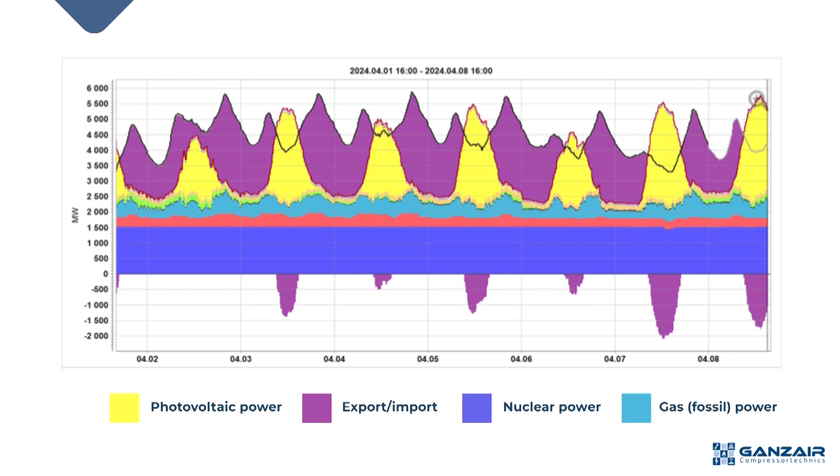The other is the general concept of being as independent from other countries as we can. Nuclear power and photovoltaic plants are getting more and more important in the national energy mix. The third is the functional and technological aspect. Electricity balancing and energy storage is a main challenge here.

Green hydrogen can be a reliable solution for this problem. Green hydrogen can be stored longer than electricity in a battery. On this graph, you can find PV in yellow, and you can see at noontime the excess energy is a very big challenge to export or use. Hydrogen can be a very good solution for this problem on the usage side, and also to store the energy as hydrogen.

Ganzair's experience is that lots of industrial companies also feel this challenge. Great, thank you very much. Ákos, could you add something to this topic?

We have a little experience with photovoltaic parks right now. The plus side is these parks are relatively cheap and easy to maintain. But when we have sunshine, these parks make a lot of energy, which you have to use or transfer. So the question is, what do you do with the excess energy in daytime? If you want to transfer it, the peak performances during daytime really stress the systems. So you need to find a way to equalize it or use it internally.

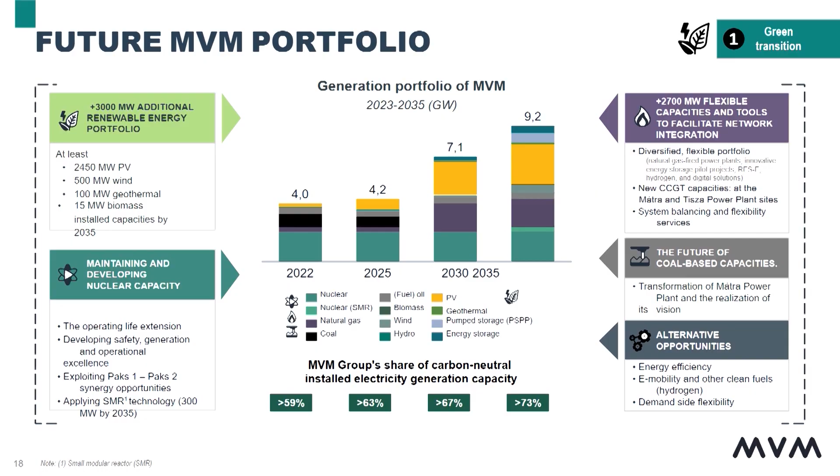The current solution for this is actually another form of flexibility imports from the surrounding region. We are quite well integrated in the electricity market with our surrounding region. So the hydropower plants from the Balkans, south of Hungary, and from Austria, for example, have quite good business models to supply countries like Hungary that have no flexible resources available. So it's an interesting development right now.

And after we survived the energy price shock, we now see negative prices in the daily markets, and there is quite a large improvement and possible business solution for storage as well. That's what we need to explore, and we need to further develop with innovative solutions.

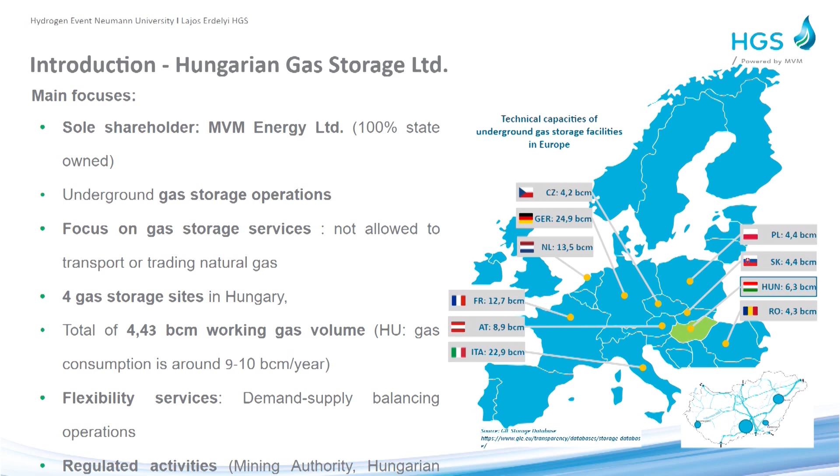Yes, thank you. I'm Lajos Erdélyi, and I work for the Hungarian gas storage company. As you know, Magyar Földgáztároló is the largest gas storage company in Hungary, and as you can see, in Europe we have a very huge capacity for storing gas.

Natural gas, and traditionally we work in this sector, but we're seeing changes in the energy industry and the need for seasonal storage of energy. That's why we've started a lot of research and development projects in order to find out how to store energy in the form of hydrogen, in liquid or gaseous form, using existing infrastructure such as our gas storage facilities, as well as new equipment and storage tanks.

So you can step further. You can see 4 research and development projects in this slide.

First one is so-called Aquamarine. It has been started and finished, and now it's in operation. In the Aquamarine project, we made a lot of research programs to find out the possibility and circumstances of hydrogen storage problems.

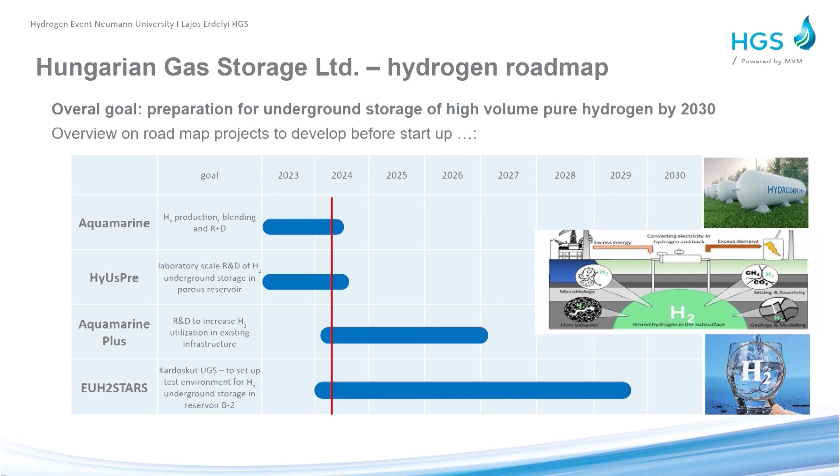The next project has been started and finished also, the HyUsPre. I will talk a bit about this project. The task of this project is to find out how underground gas storage sites could be used for hydrogen storage.

The next one started at this time, so-called Aquamarine Plus. This is the second phase of the Aquamarine project. I will tell you something about it.

And the fourth one is EU H2 Stars. This is an EU-funded program in order to make a working underground hydrogen storage project using the existing and new capacities and facilities. You can step further.

You can see some details about the project Aquamarine. This is finished, as I said. In this project we settled a 2.5 MW electrolyzer which use electricity to produce hydrogen.

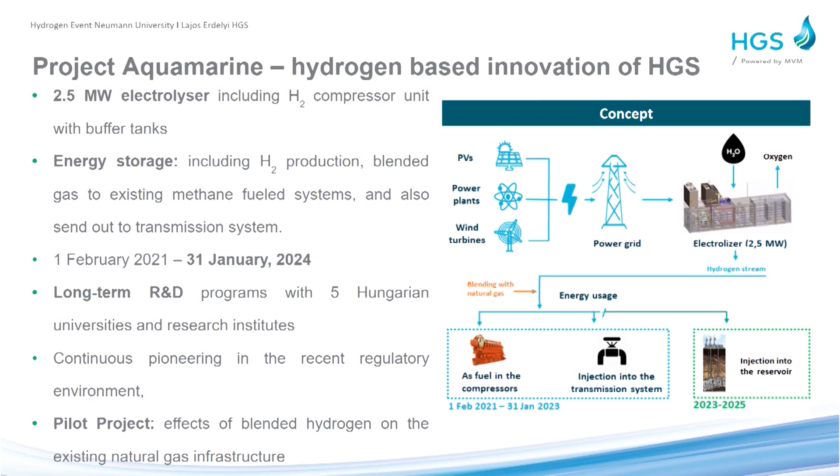Mainly our main task was to use the excess electricity generated from photovoltaic power plants - this is cheap balancing electricity which can be used to produce hydrogen. We also made the infrastructure to store the hydrogen, to compress and store it in gaseous form in bottles.

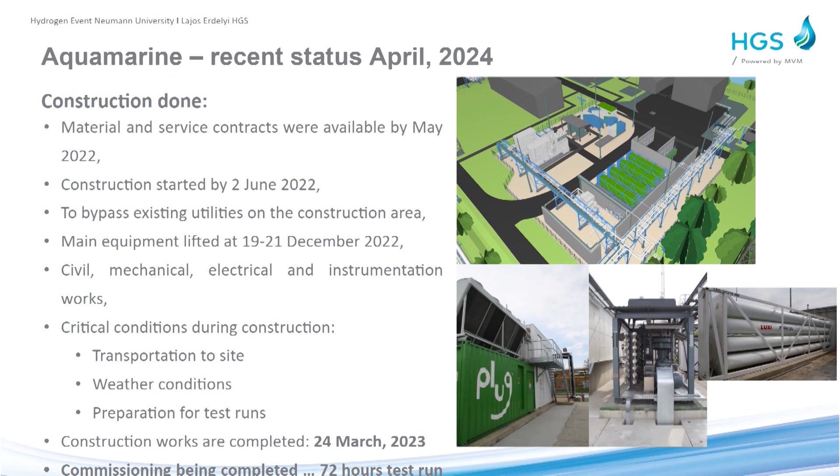We can step further. You can see some pictures and plans about this Aquamarine project. It is finished. You can see in the pictures the Plug Power type electrolyzer, a hydrogen compressor, and at the bottom, the hydrogen tanks. The test run has been done, so this facility is in working condition and is under testing now.

We can step further because I'm going out of time. Yes, we can step, please. Thank you. The next project, the EU H2 Stars, has started.

This project is an EU-funded project. In this EU H2 Stars project, we are going to plan a new hydrogen pipeline from the Kardoskút side to transport the hydrogen into a repurposed well, and our task is to inject the hydrogen into the underground gas storage layer.

We are going to do a lot of tests - a 2-year test run. During these 2 years, we will gain a lot of experience in gas storage in seasonal form. Okay, we can step, please.

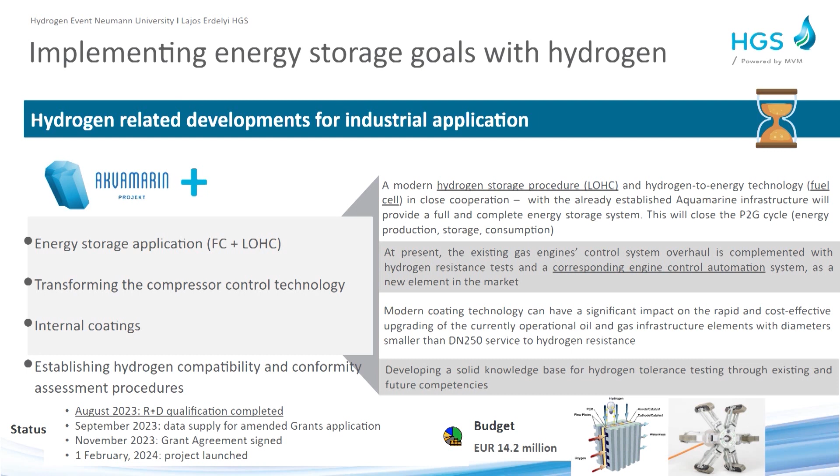You can see some details about the Aquamarine Plus project. This is a research and development project funded by the government. The first sub-project is LOHC, a liquid hydrogen storage program.

The second one is a control technology project in which we are repurposing existing gas engines to use hydrogen as a fuel. And the third one is hydrogen-resistant coating development, an internal coating for gas pipelines.

And the fourth one is the compatibility and conformity assessment procedure development, in order to find out how the existing infrastructure can be used for hydrogen purposes and how the pipes and equipment can be used. We can step further.

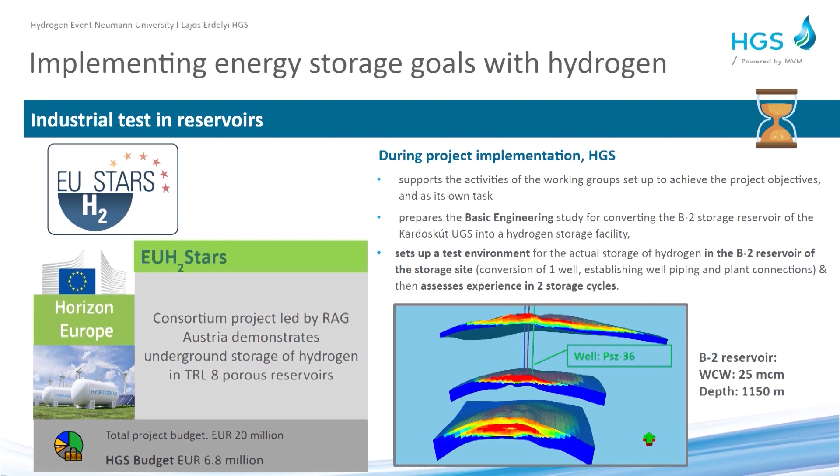I would like to say that we have an existing gas storage facility in Kardoskút with a separated layer, and this small separated layer shown in the picture in the middle will be used for storing hydrogen, gaining it back, and for utilizing it. And we can stop.

Thank you. Thank you very much. I can add that I have already visited this Aquamarine plant, and it is rather fascinating.

Ladies and gentlemen, we have already arrived at hydrogen, and we are going on. Third question: what role do you think hydrogen can take in our energy mix? What are your plans for the near future? Ákos, can you please?

Thank you. So about the future plans, the municipality aims to further diversify our energy portfolio, and we would like to complete the decarbonization process by 2030 or 2040. That's the goal. Right now, about hydrogen, we are planning to decarbonize the whole local public transportation system.

Right now we have 25 hybrid buses and 45 diesel buses. But the City Council already approved the purchasing of 2 new hydrogen buses at the start of 2025, and 8 more at the start of 2028.

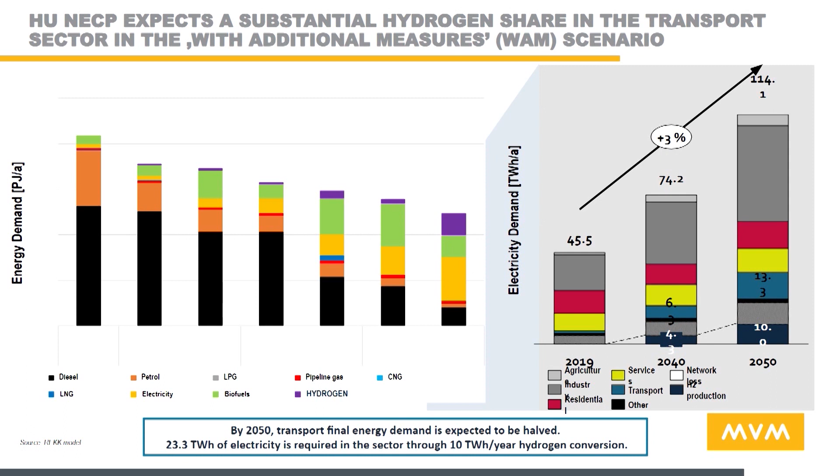We see that battery-based, fully electric solutions are rapidly emerging in passenger-sized or small-scale vehicles, but the debate is very much open regarding the supply of larger vehicles. All in all, we see that the industry and the transport sector will need the most amount of hydrogen in Hungary as well, and the main question is how we generate this hydrogen. That's the huge concern for most electric and gas utilities like MVM - how we can generate the energy needed for hydrogen generation.

It is expected that hydrogen generation itself will need around 10 or more terawatt hours of electricity if we are going to generate this from network transported electricity, and that's around a quarter of our current electricity demand. So it's quite a huge demand right now.

So it's going to be an interesting strategy, what is evolving regarding hydrogen - how we can supply the hydrogen industry enough electricity, and whether they have enough technology advancements to use this electricity supply only when it's quite cheap. So when the sun shines, there will be quite a few cheap solar supply. The main question is whether this is enough for the hydrogen generation sector.

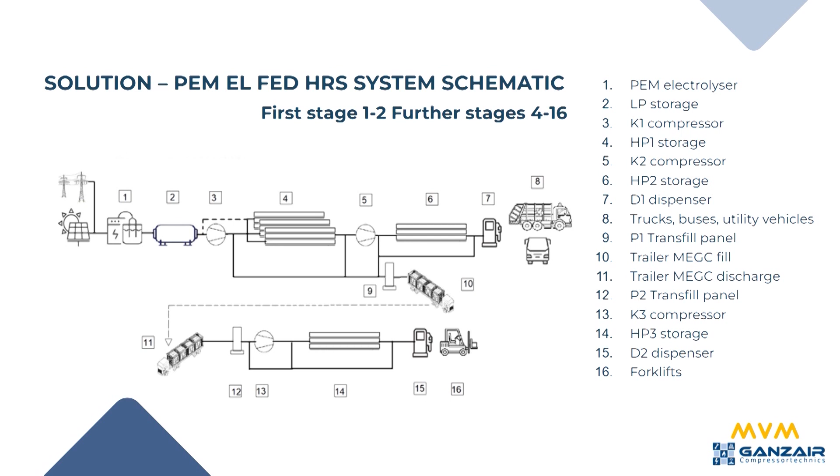Yes, can you show the next? Thanks. On this layout picture, you can see how complicated the system is. Ganzair has deep experience in how to integrate units into a whole system, and this is a big challenge because every little detail is very important, and every little unit has its own communication and properties. Ganzair, as a system integrator, knows how to fine-tune the system.

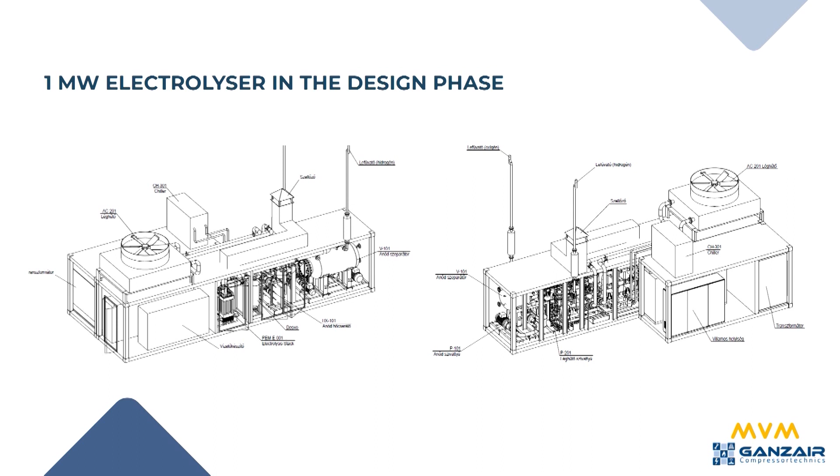Next slide - you can see Ganzair starts a new research and development project, which is a 1 megawatt electrolyzer, because our experience is that there is a certain segment of this industry that wants to use and apply hydrogen, and we want to satisfy this sector of the industry. My colleague Achilles will talk in detail about this electrolyzer in the next session. Thank you.

And we have arrived to our last question, just in short: which factors through the hydrogen value chain do you think limit the spread of hydrogen energy? Laszlo, please. Thank you for the question.

I think a lot of factors influence the price of the produced hydrogen. At first, the system cost - the cost of the equipment and the labor is increasing, and in the last 3 or 4 years it has doubled. So we can see a significant price increase in the cost of implementation of the system.

Also, very important is the price of the electricity if we are going to produce hydrogen from electricity. The price of electricity in the industrial market is not a fixed price - it changes daily due to excess energy and negative energy demand.

In case a lot of solar panels are in operation, a lot of excess energy is produced, so the price of the electricity is going to be lower. But the main problem is that the period of low price electricity, so-called cheap green electricity, is very, very short. So daily we have only half an hour or one hour to utilize the cheap green electricity.

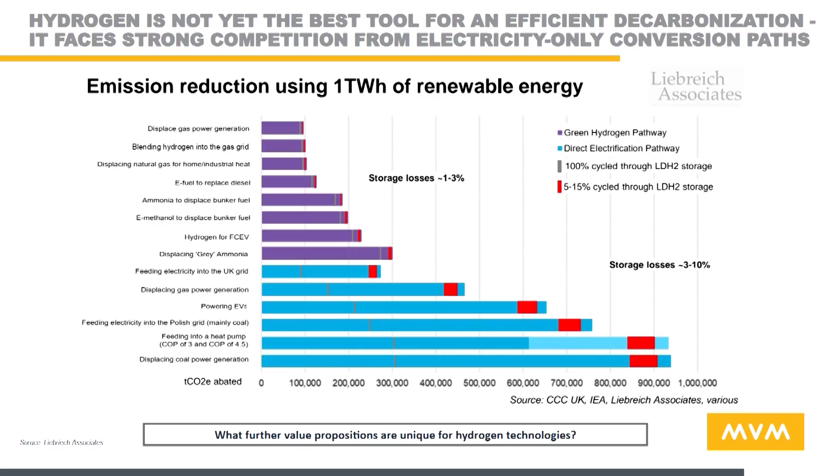So hydrogen is competing with other emerging and developing technologies - the electricity-only pathways and other gas-based pathways as well. It's interesting to see that if we are facing negative prices, of course the conversion factor is not an issue.

But if we are facing the prices we experienced two years ago, which were all-time high energy prices for all sources of electricity and energy, then it's a very grave issue for this technology. So the key here is whether we can reduce the conversion losses in the hydrogen economy.

The other part is the capex, or capital expenditure intensity, of this technology - but that's quite similar to other clean energy technologies. So it's an economic issue, especially for developing markets like Hungary, how we can finance such a large amount of investment in our energy sector. That's not specific to hydrogen, but of course hydrogen is not advantaged in this aspect as well. So these are the key challenges ahead of us.

Thank you very much. Ákos, could you add something? Yes, well, the gentlemen have already said everything, I think. Maybe one thing to add from the buyer's perspective - as I mentioned before, as a municipality, we don't really have a budget to finance these very highly expensive projects.